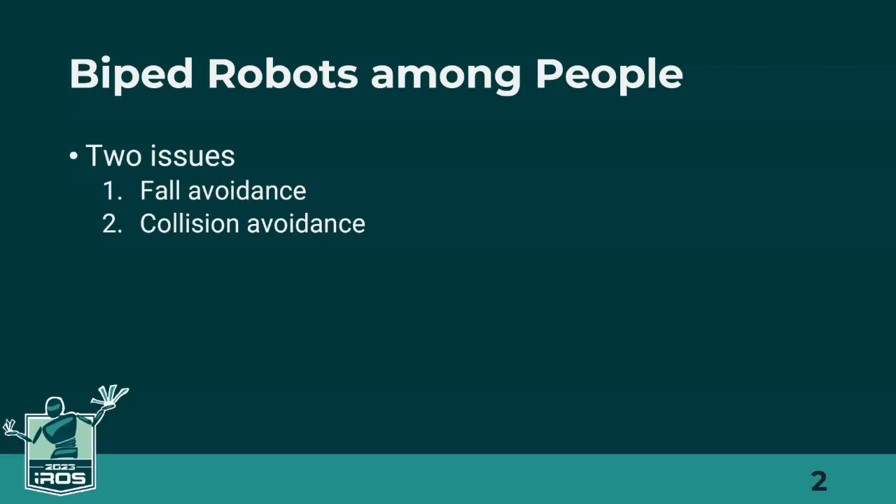The research presented today is about the concept of time to danger, which is an alternative to passive safety for the locomotion of a biped robot in a crowd. For a biped robot moving among people, there are two issues. The robot should keep its balance and it should avoid collision with people.

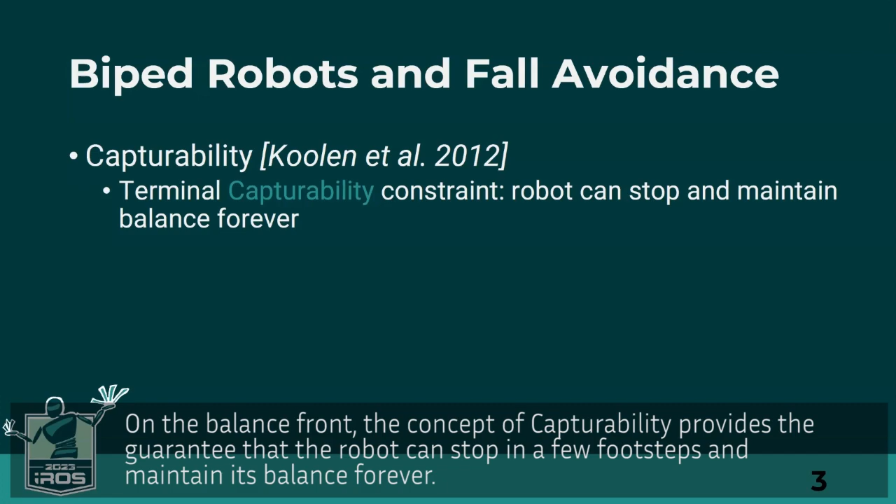On the balance front, the concept of capturability provides the guarantee that the robot can stop in a few footsteps and maintain its balance forever. On the collision front, things are more complicated. Crowds of people mean dynamic and uncertain environments.

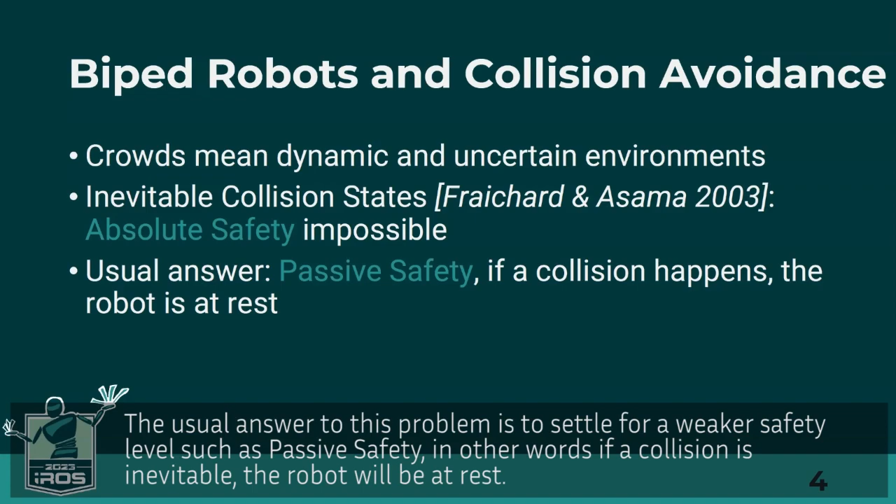In such situations, the concept of inevitable collision states shows that absolute safety, in other words no collision ever, is impossible to guarantee. The usual answer to this problem is to settle for a weaker safety level such as passive safety. In other words, if a collision is inevitable, the robot will be at rest. Many robots use passive safety today.

Passive safety has a number of advantages, but it is not flawless. It can be a source of collisions when the robot stops and does not leave enough time or space for the people to avoid collision. The purpose of this research is therefore to explore an alternative to passive safety and to investigate whether maximizing the time that the robot has to replan its motion or that a person has to react can yield fewer collisions, and therefore improve safety.

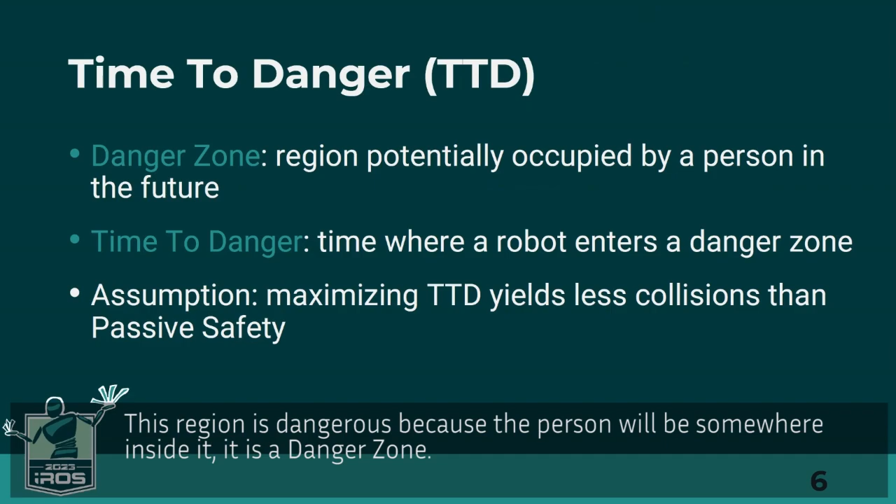To that end, the novel concept of time to danger is introduced. For a future motion of the robot and a person, time to danger is the time where the robot enters the region where the person can potentially be in the future. This region is dangerous because the person will be somewhere inside it. It is a danger zone.

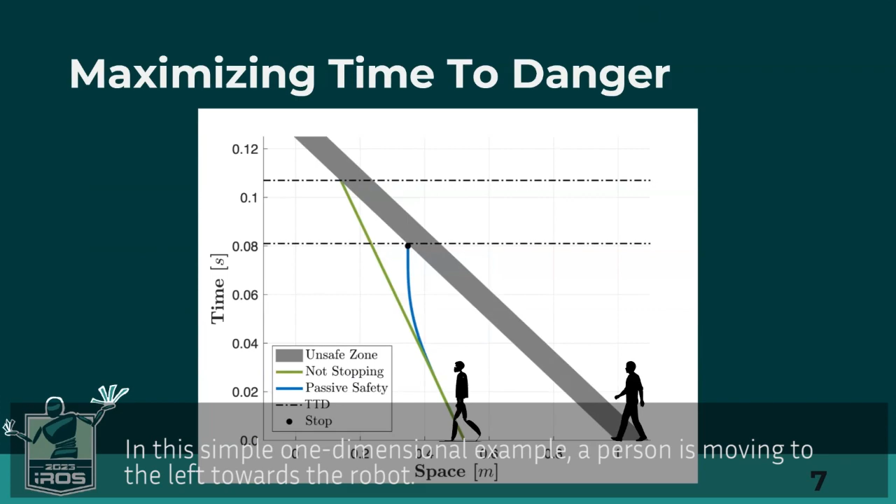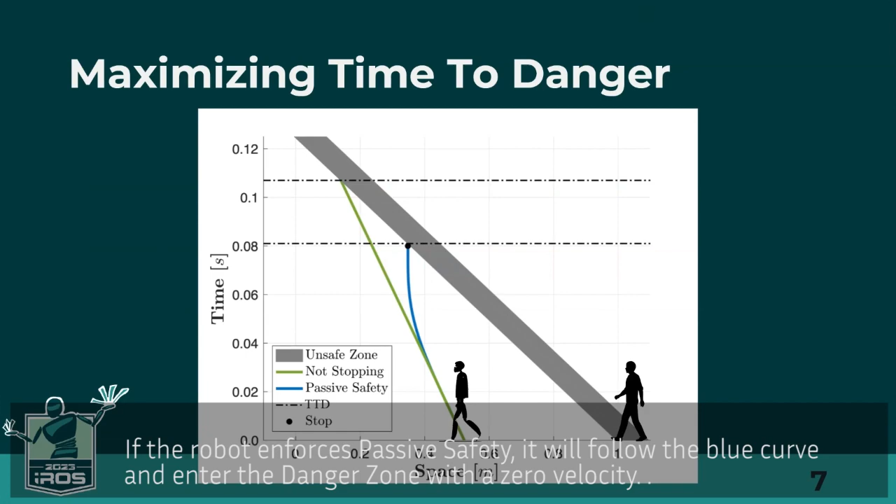In this simple one-dimensional example, a person is moving to the left towards the robot. The robot cannot outpace the person and the collision is inevitable. The gray area is the danger zone. If the robot enforces passive safety, it will follow the blue curve and enter the danger zone with a zero velocity. If this constraint is lifted, the robot can enter the danger zone later by following the green curve, thus increasing the time to danger.

To test whether maximizing the time to danger yields fewer collisions than passive safety, two locomotion strategies are compared. The first one from the literature uses Model Predictive Control and guarantees fall avoidance and passive safety. The second one has been developed in this research. It also uses Model Predictive Control. It guarantees fall avoidance and time to danger maximization.

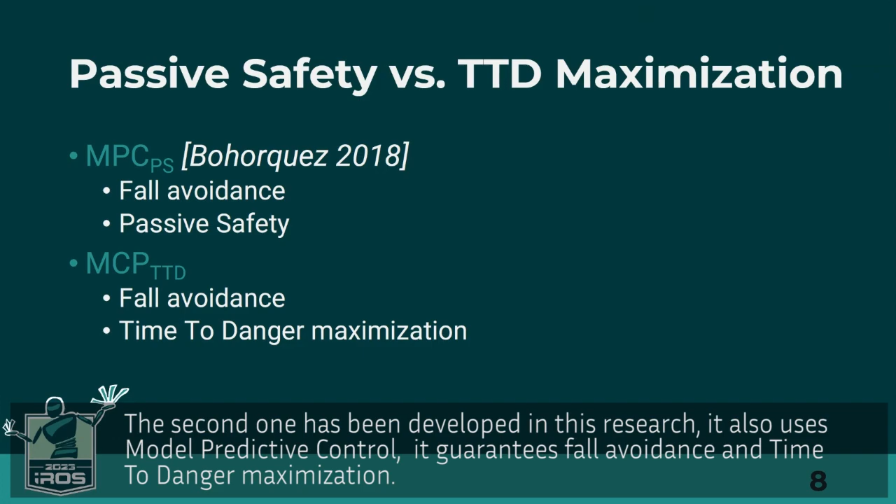To compare the two locomotion strategies in exactly the same conditions, a blind crowd scenario is used where the robot is the only one that seeks to avoid collisions. The robot walks in a direction opposite to the crowd. 3,600 simulations under different conditions are used to benchmark the two locomotion strategies.

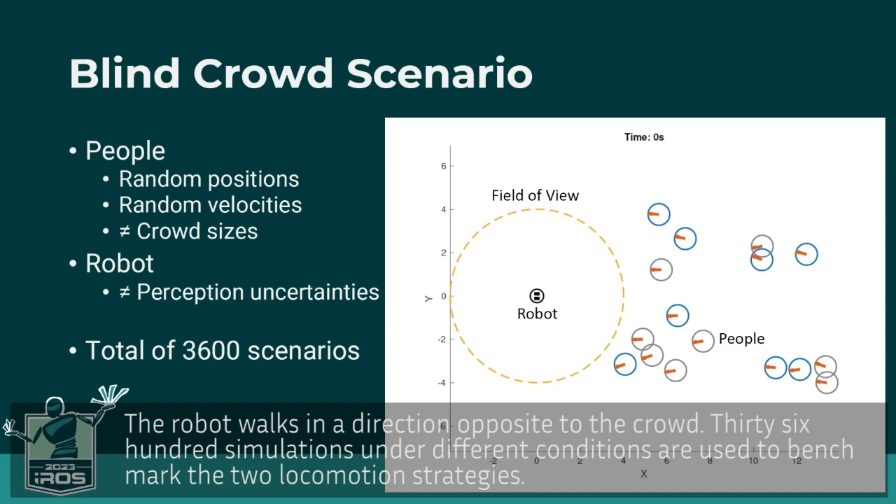The first two criteria considered to evaluate the time to danger maximization strategy are collision count and collision time. The results obtained clearly show that time to danger maximization yields fewer collisions and, as expected, collisions happen later in time.

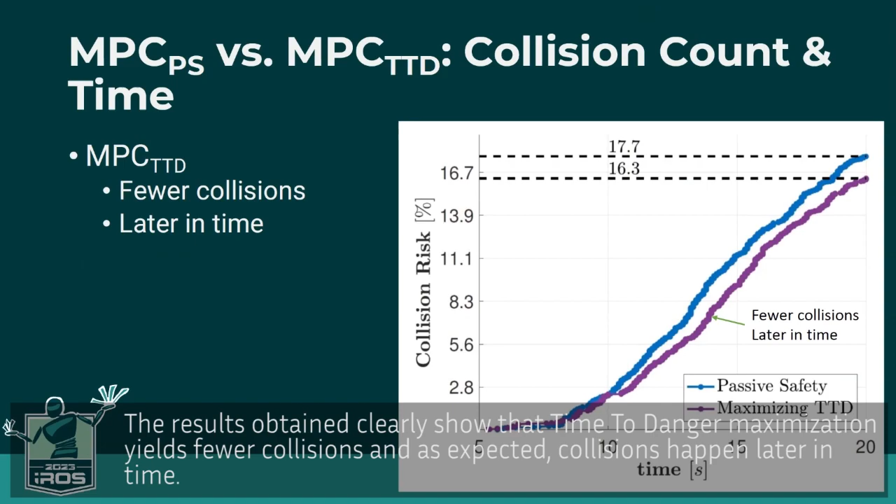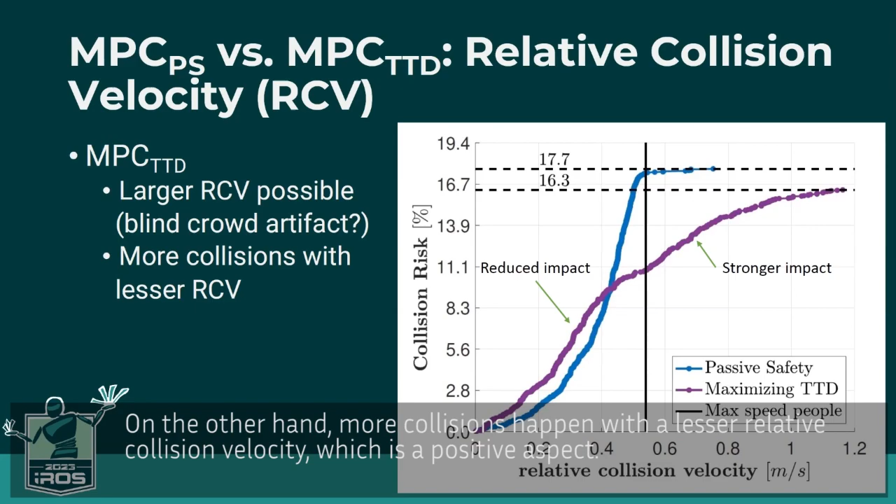The last criterion considered to evaluate the time to danger maximization strategy is the relative collision velocity between the robot and the people, which is related to the strength of the impact. On the one hand, this strategy opens the possibility for larger relative collision velocities, which is clearly a negative aspect. However, this may be an artifact of the blind crowd assumption. In the real world, people would be aware of the robot and would seek to avoid collisions. On the other hand, more collisions happen with a lesser relative collision velocity, which is a positive aspect.

To conclude, this research has demonstrated the interest of the concept of time to danger as a new tool to address motion safety in dynamic and uncertain environments. It is a viable alternative to the passive safety concept. Future works include a careful evaluation of time to danger in reactive, non-blind crowd scenarios.